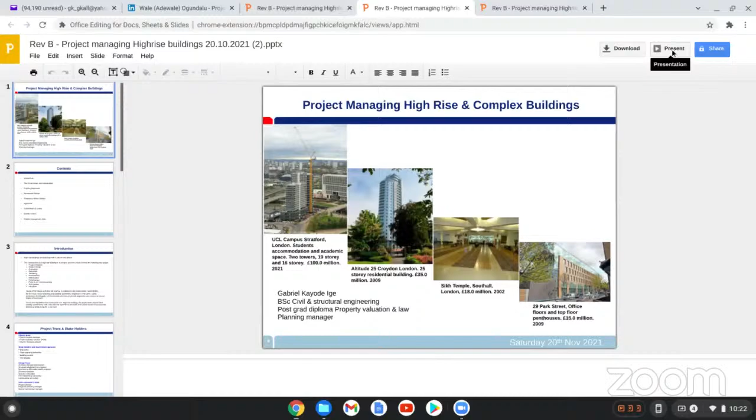Mr. Ige, I believe you're on mute, sir. Yeah, thank you so much, Sean. Can you see my screen? Yes, you can. Thank you all for spending this Saturday morning with us. I'm just trying to get my slide. Am I on slideshow format now, Sean? Hello, Sean, am I on slideshow? Can you see my slide? Hello? Yes, we can, yes we can. Oh, you can see. Sorry, you can't see me, I was giving you thumbs up but you can't see me. Okay, okay, thank you so much.

I'm delighted to be here today to share my experience. Most of my experience has been from the UK, but I've done some short-term consultancy work in Nigeria and interacted with various stakeholders in the construction industry.

This slide is showing a few notable projects I've worked on. The first one on the top left is a job we're currently building, and that photograph is not an artist's impression, it's actually a photograph of the project taken from another project which is 38 stories. This project is the secondary campus for University College London, based at the Stratford Olympic Village. Students accommodation, 524 rooms, 2 towers, one 19-story and another 16-story, sitting above 4 floors of academic space. The value of that is 100 million, and it's due to be completed in May next year, so we're working really hard to get that done.

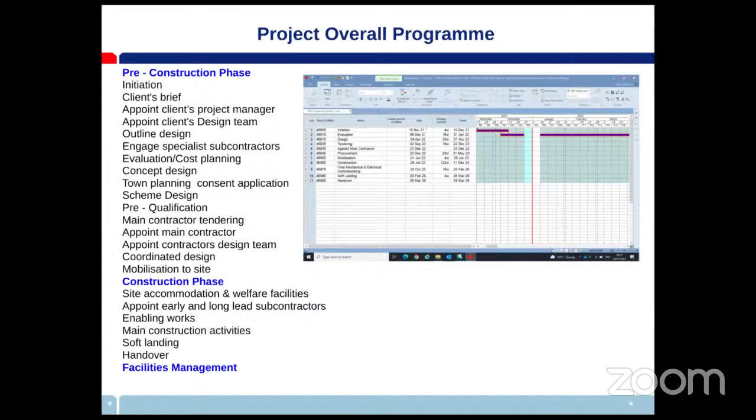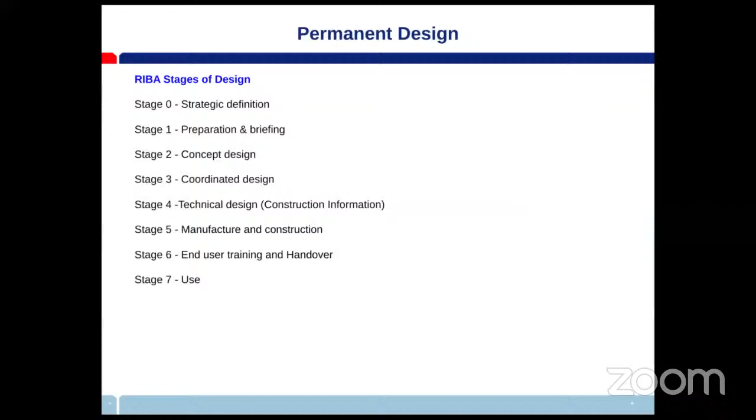Temporary works design: the design solution used to support the permanent work. So while the concrete is still not up to strength, you need to put in some temporary works to support it till the concrete slab and beams gain 28-day strength. Or we use it to support trenches while excavating for drainage, or as the foundation for a tower crane, and also sometimes access scaffold for access. You can also put in some fans to protect people walking below, including the public.

Examples of temporary works are site boundary hoarding, site accommodation, gantry, tower crane foundation, cantilever deck, hoist, mast climbers, and so forth. You can see there are some sketches here, showing on the left where you have a suspended slab as you're going up till the slab gains 28-day strength.

You have to actually put in some props, so you have the falsework right at the top which supports the slab that you're going to cast. Below that, you need to have another 2 levels of props, just to make sure, because the slabs below might not be able to take all that load, as the loads haven't been transferred into the column. So you temporarily support it, and you crush your cubes till the slab above reaches the required strength. Then you can remove some of the props.

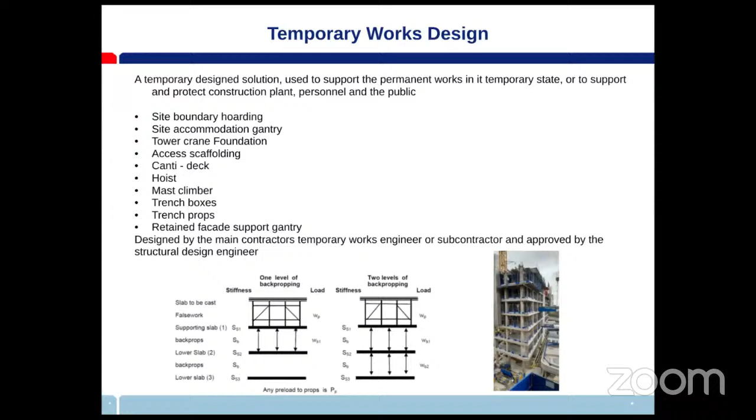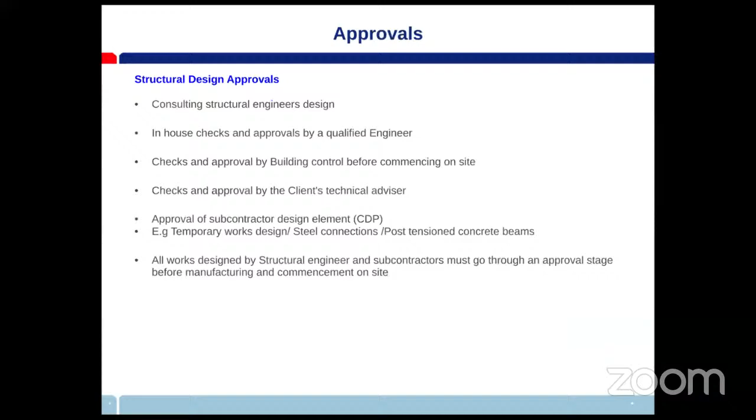Approvals: the consulting engineer does the design, and then another in-house engineer will do an independent check on his design. Then you submit to building control, who does the checks and approves before we start on site. The client's technical advisor would also do his own checks and approve. There are also some subcontractor design elements, like structural steel or cladding, where the subcontractor would develop the design and then submit for approval again to the structural engineer. So at every stage, everything must be checked and approved before you actually go into manufacturing.

CDM regulation - construction design management regulations. It's a law, an act in the UK where everybody has responsibility, every player. The aim of CDM regulations is to improve health and safety in construction work. It's a legal requirement.

The golden rules of CDM: CDM applies to every construction work in the UK, even if it's just 1 hour of work - you must apply CDM. Anyone appointed to work on a construction project must have the skills, knowledge, and experience to carry out their role. Each duty holder has his own duties that he must carry out under CDM.

The role of the principal designer and the principal contractor must be appointed on a project with more than one contractor. There can only be one principal designer, and that principal designer is responsible for the design. The principal contractor is responsible for safety on the construction site.

Projects with more than 500 person days, or 30 working days and more than 20 workers, need to be notified to the Health and Safety Executive.

Pre-construction information must be provided by the client on every project. A construction phase plan must be provided for every project by the principal contractor or sole contractor. The principal designer must create and develop a health and safety plan to hand over on completion of the project.

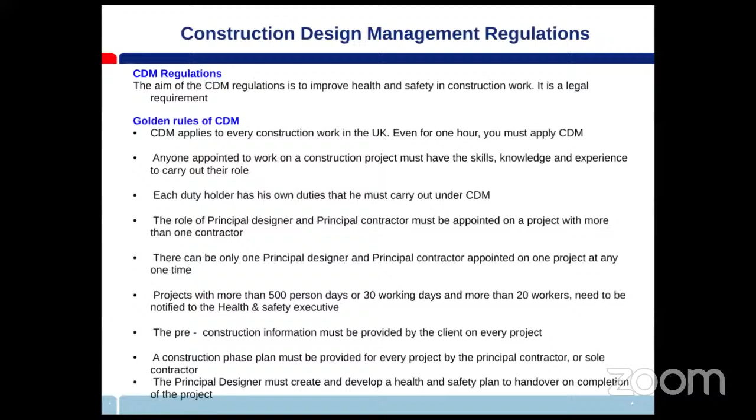There's one bullet point I missed - the client also has responsibilities under CDM. So everybody has responsibilities. Nobody can say, I blame you for that. You have your own responsibility legally.

Quality control. There are some basic but very important quality control procedures. Before you even start constructing, you need to produce what we call inspection and test plans. You produce that by going through the structural engineer's specification and listing out anything that needs to be approved - for example, the pour layout of the plan, where your construction joints are going to be. It'll tell you how many cubes you're supposed to test, the slump, and the layout of your formwork.

It's like a checklist that you give to the engineer, and he can use that for his checks. So basic checks before the concrete is cast: check the formwork, check the false work. False work is what supports the formwork, which is the plywood that contains the concrete. Check the reinforcement, that it's according to the reinforcement drawing. Check cover, that is the gap between the reinforcement and the formwork, so the concrete surrounds it properly and it performs as required. Check for cleanliness - if you have mud in the concrete, it wouldn't perform as it's supposed to.

Once you've done all your checks, the site engineer would sign an inspection sheet showing exactly what checks were done and what remedial works have been done before the concrete goes in. When the concrete arrives, you check the delivery note - we have ready mix concrete in the UK. Make sure it's the right concrete mix, because in some cases the wrong concrete mix has been delivered, and if you don't catch it in time, then you're looking for trouble.

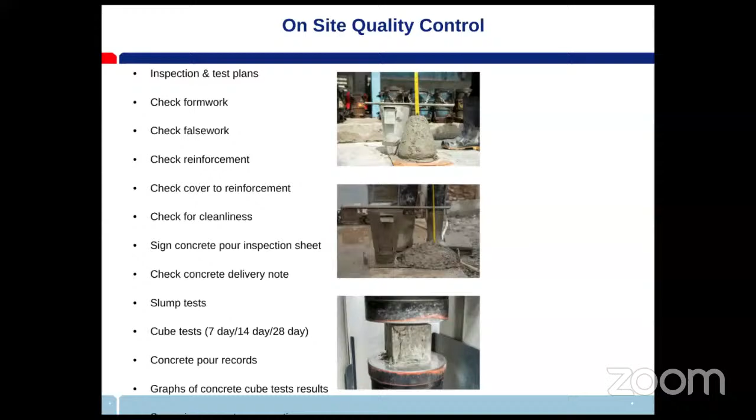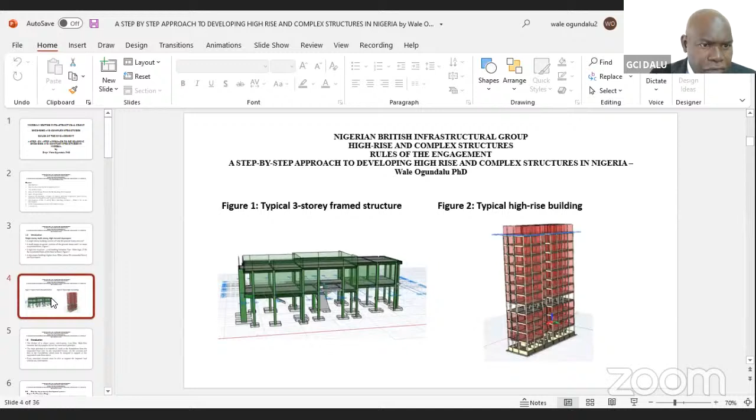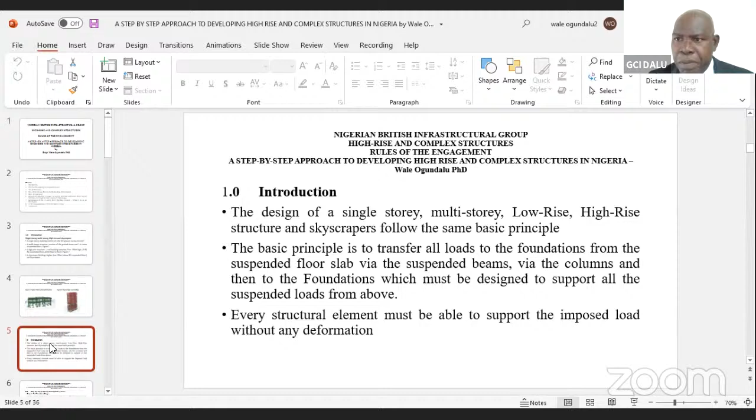I was on slide 5, and slide 5 has to do with the introduction. I was mentioning that the design of a single-story building, a multi-story building, and a high-rise or skyscraper follows the same principle, and that is to transfer the load from the superstructure to the foundation. All vertical loads and horizontal loads in the structure are transferred to the foundation, and the foundation is to be built without any unnecessary stress.

There are 7 basic steps to the property development process. Step one is the pre-purchase stage, whereby you go ahead and source for funds, source for the land, and decide on what to do. The second step is the contract negotiation. You negotiate for the price of the land and you buy it, or you might decide you want to take it on a lease and the terms of the lease.

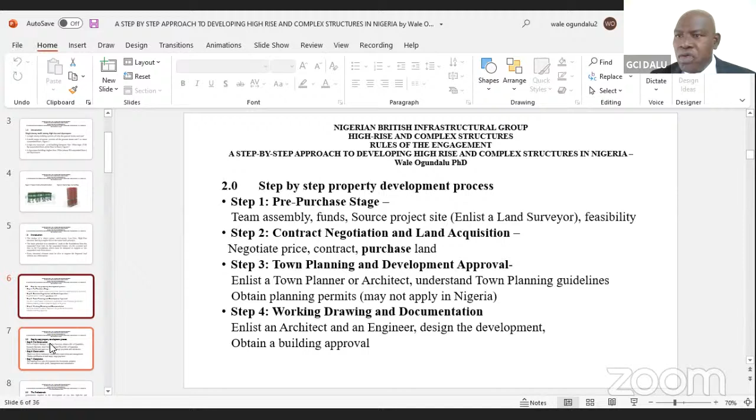Then 3 is the town planning and development approval process. Usually in the UK, you might have to go to the council, first of all, to obtain approval for the proposed development before you go and do the drawings and all those things. Here in Nigeria, it may not be necessary. So the next thing is you do your working drawings, and after you do your working drawings, which is step 4, you go and submit them for approval.

And then step 5 is the pre-construction, in which case you negotiate with the builders, you select a contractor, and then you hand over the site to him in step 6 for the construction. You hand over the site to the contractor, and he does all his work under supervision. And when he completes his work, step 7 is the completion. He hands over the keys to you. And then you decide whether you want to sell or lease the building, whether you want to make quick money, or you want to make

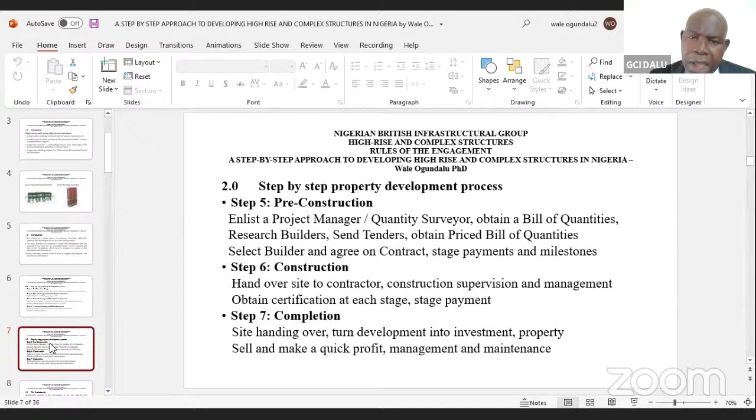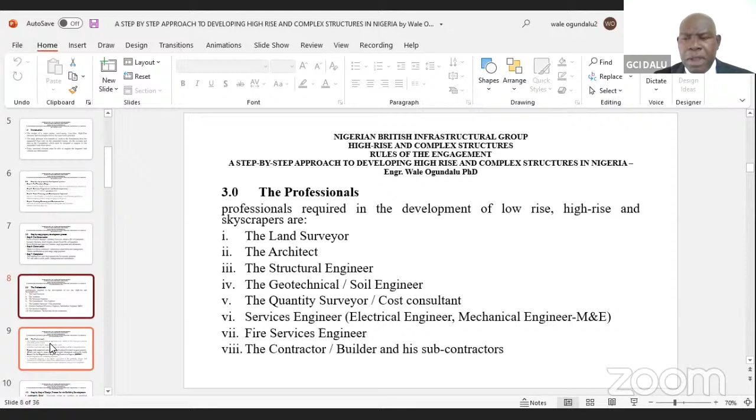longer time. The professionals involved in the design of a high-rise structure are the same you will need when you want to design a bungalow. This includes the land surveyor, the architect, the structural engineer, the geotechnical engineer, the quantity surveyor, the service engineers, and then the contractor. We encourage people to engage only competent and capable registered professionals on your project. And the client has the right to view your qualifications to confirm that you are not a quack.

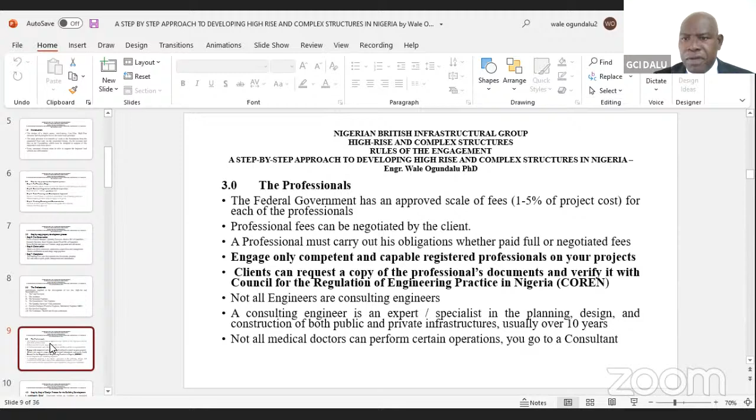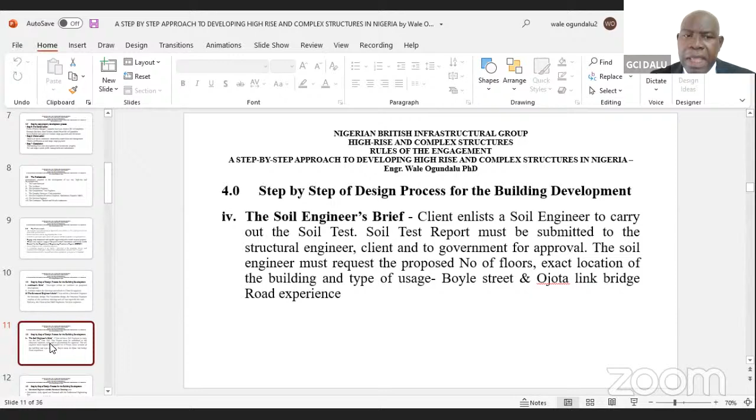In order to complete his job, the structural engineer needs the soil test report. You must do a soil test report for every site you are building on. Under every building, you must do a soil test. Then the geotechnical engineer writes the report and sends it to you. As an engineer, you are interested in the soil profile under the building and the allowable bearing capacity of the soil. After the structural engineer completes his job, he gives the drawings to the client.

The client also enlists services engineers, M&E, and the rest, and all of them do their calculations and drawings and hand them over to the client. The client then enlists a quantity surveyor who does the bill of quantities, and then they can invite bids. The bid can be open or closed. Open, you advertise to the general public and they submit. Closed, you select some contractors and they make their bids. Then you select the best 3 and invite them for further negotiations. After that, once everything is done, they move to site and start the work.

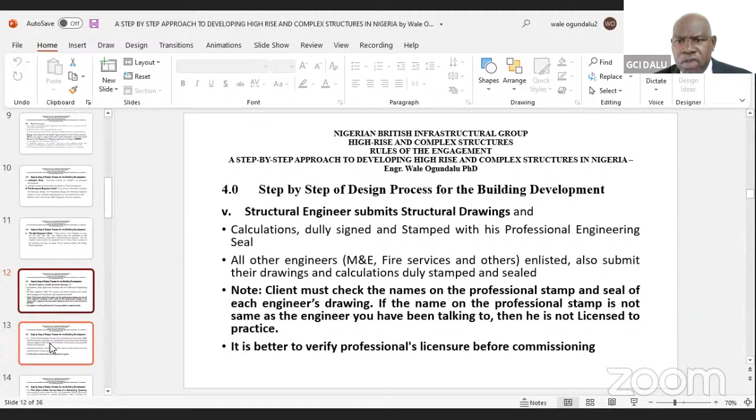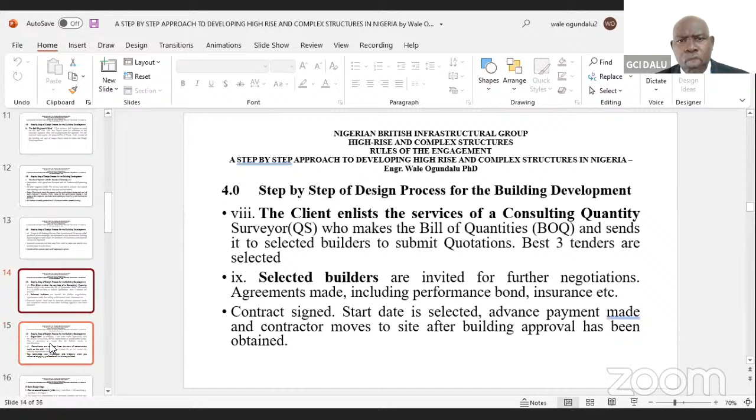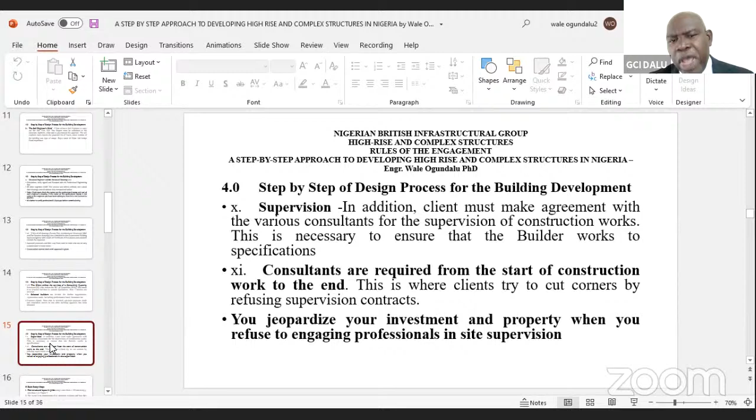It is best to verify professionals and make sure that you also have an agreement for resident supervision. Construction cannot start until approval is given. Select your builders. Then consultants are required from the start of the construction to the end of the construction work. You jeopardize your investment and property when you refuse to engage professionals in site supervision.

Basic design steps. For the structural engineer, the first thing is to do your structural layout. That is the general arrangement of the floor plan. You arrange the slab to be supported on the beams. You arrange the beams to be supported on the columns. And the columns, you try as much as possible for them to be vertical and to transmit the load directly from the upper floors to the foundation. When your columns are not straight, you have more headaches.

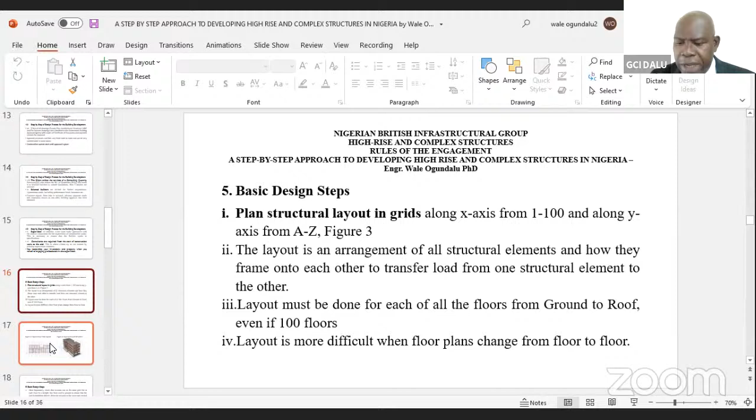This is a basic typical floor plan, and you can see a typical frame structure. You can see the columns, they are straight and they go down. Most of the time when you are doing your design, you start from the roof and then you go down. I, as a person, make sure that I arrange my frames in grids, and I can identify each column from the grids. I can call them column B12. That is the column on grid line B, and on the other side on 12.

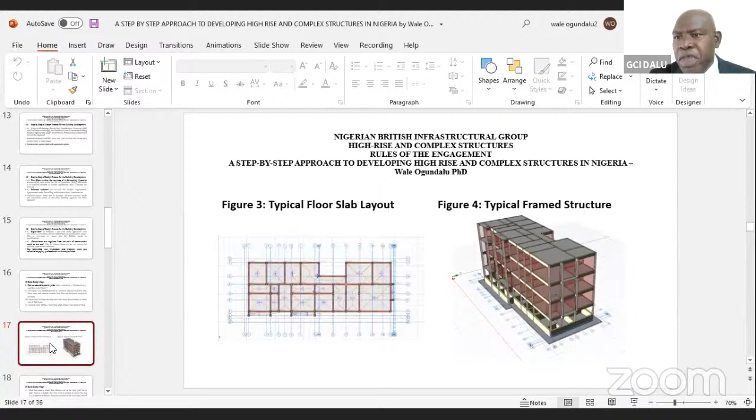Basic design steps: like I said, you do your design calculations and everything from slab onto beam onto column, floor by floor. For high-rise buildings, you need to check the stability of the structure under wind load. You need to obtain the wind load and distribute it onto the wind-resisting elements. Usually, we use shear walls. But if you don't want to use shear walls, you can use a column and frame structure.

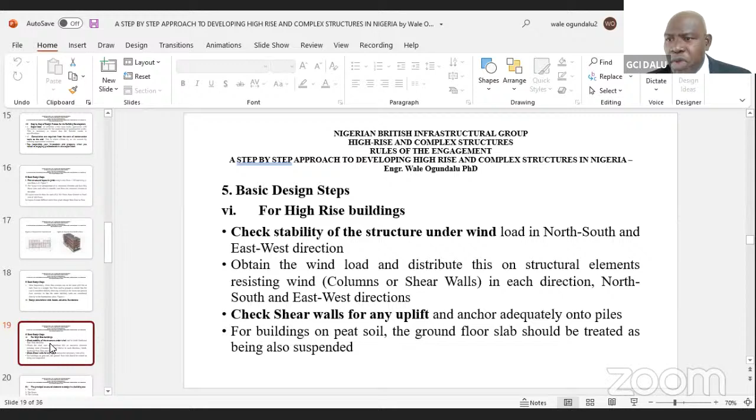Then you also check that for the shear walls there is no uplift. And if there is uplift, then you find a way to anchor it onto the supporting pile foundation. So these are the principal structural elements that you design.

And then basic signs of distress in a building: you have cracks, horizontal or vertical. When you have vertical, it's a sign of a foundation problem. Then you can also have settlement, and you can also have tilting. Tilting is a form of settlement, but differential settlement. And you can have settlement where everything settles down along the same direction. But once you have a settlement of more than 25 mm, then you may be having a foundation problem.

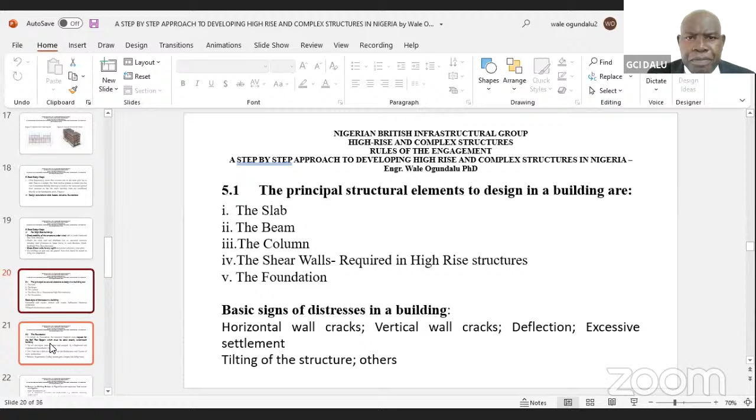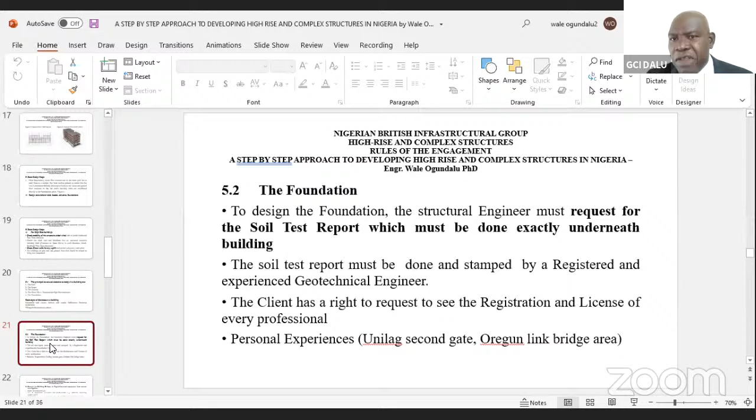Foundation. For every foundation, like I said, you need a soil test report, and the soil test report must be done by a registered professional. There are many quacks in the system, and this is why I'm mentioning all this. When the time comes to share some experiences, we can talk further on that.

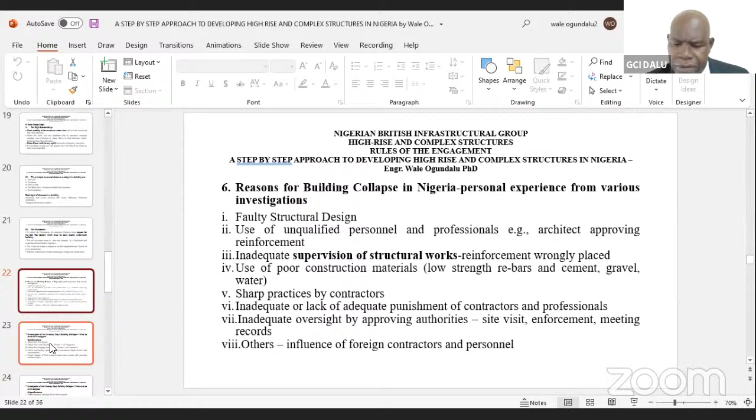Reasons for building collapses in Nigeria. The first one I would say is faulty structural designs. Use of unqualified personnel, inadequate supervision, sharp practices, and then I will also say influence of foreign professionals. When we need to expand on that, I will do that.

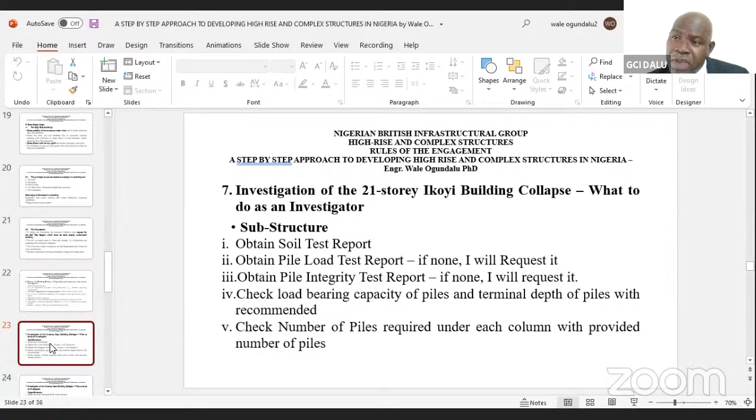These are areas where you have sharp practices. You tell somebody to do piling to 30 meters, and he stops the piling at 12 meters. One, you have reduced the pile capacity. Two, if you are unlucky and you have a deep depth of peat, then you will be putting your building on inadequate soil.

For the superstructure, I will check the columns. I will obtain the structural drawings, I will obtain the structural calculations, and I will check every structural element, especially the columns. The collapse is a total collapse. It is not partial, and that is what makes it more serious, with a very serious impact.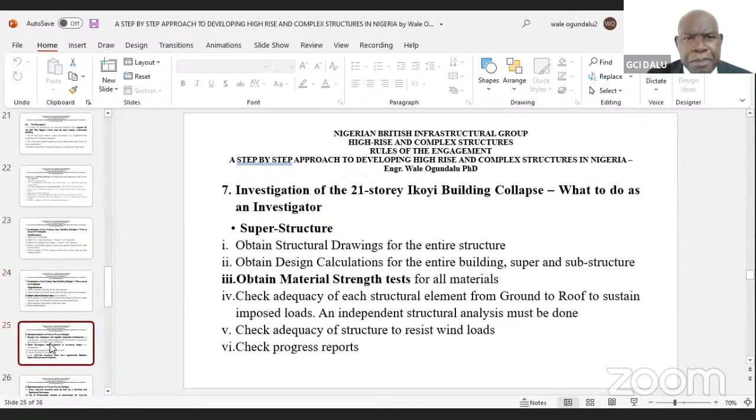Recommendations: engage only competent and capable registered professionals. Teach developers basic elements of structural design. Every high-rise structure must have an experienced resident supervising structural engineer. Every high-rise structure must be built by a certified registered contractor. Use of the direct labor method of construction for high-rise buildings must be banned.

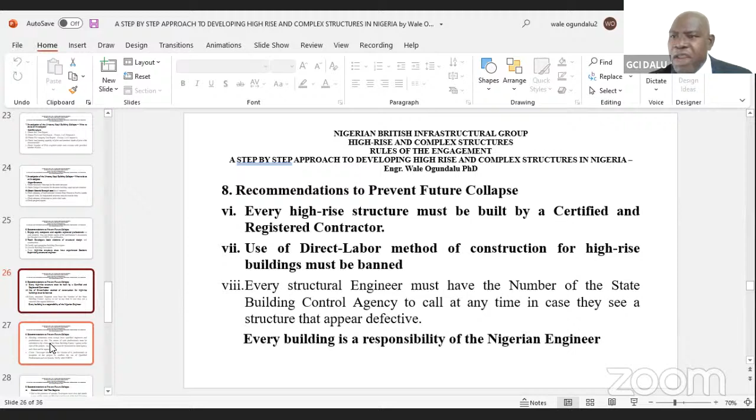Every building is a responsibility of the Nigerian engineer, because when a building collapses, it is a reflection of the Nigerian engineer. So as we go along in our daily path, look at structures. And if you see any that may have a problem, call the government agency. So the building contractor must always have qualified engineers on site.

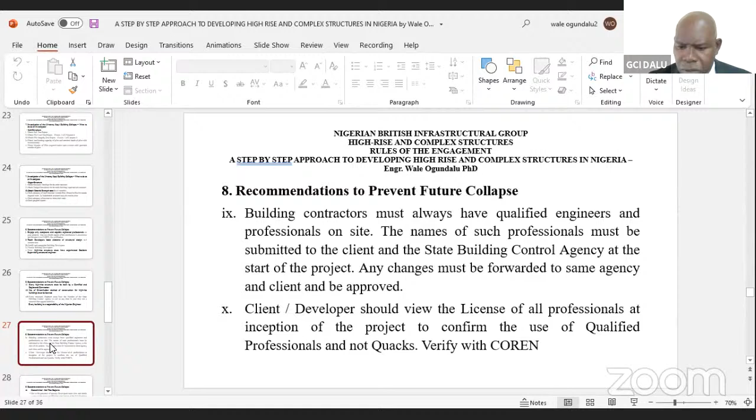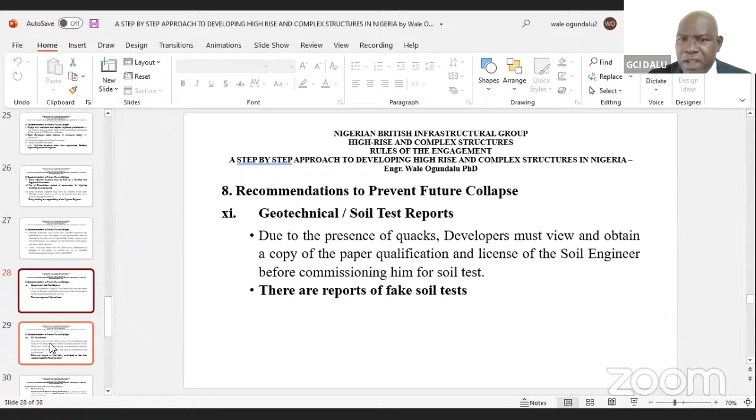For the geotechnical soil test report, like I said, because everything you are building depends on the ability of the soil to sustain those imposed loads, the soil test report must be done by a registered professional. And you must check that you are not using a quack. On the pile foundations, the same thing.

We have piling contractors now who are not really engineers. Some may have worked under some engineers before, and then all they do is get money, buy a rig, and then they say they are piling contractors, and they go ahead and start piling. Meanwhile, they are not adequately equipped, either in terms of academics or knowledge.

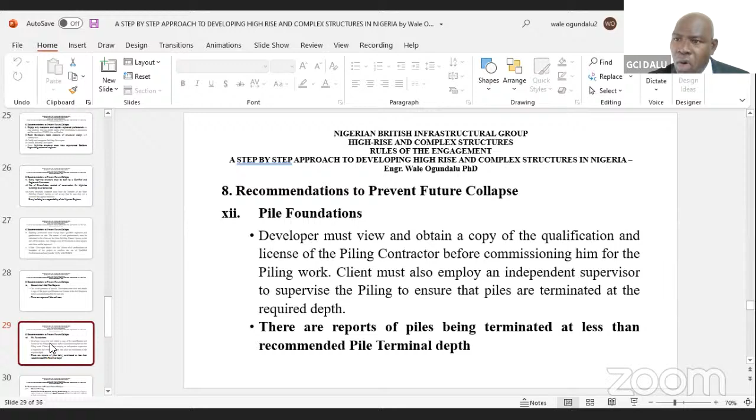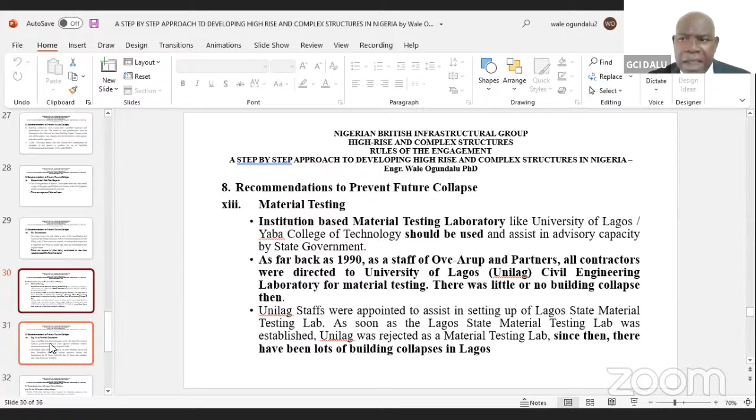Material testing. Institution-based material testing laboratories like University of Lagos and Yaba College of Technology should be used in an advisory capacity and to assist in material testing. As far back as 1990, as staff of Ove-Arup and Partners, all our contractors were referred to University of Lagos for material testing. And I can say there were little or no building collapses then.

Say no to vertical extension. Once a foundation has been built and you now go and raise the structure, you are adding load which has not been accounted for in the foundation design.

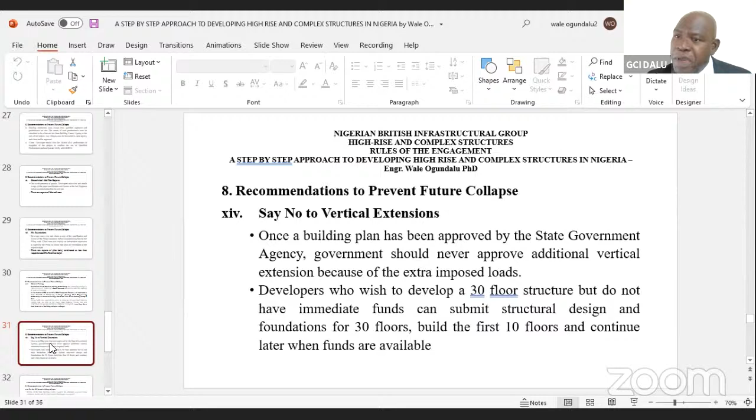I can share one or two experiences later, but if you know you want to go for 20 floors, you can design your structure for 20 floors and the foundation for 20 floors, and then build it to 10 floors if you don't have money. And then you continue later when you have money. So right from the beginning, design your building and the foundation to carry the number of floors you want.

For the 21-story building, there are some other recommendations that you need to do. But because of time, let me just run to my conclusions. Engage only competent and capable registered professionals on your project. Clients can request a copy of the professional's documents. And if the name on that document is not the person you have been talking to, just know straight that it is a quack.

Consultants are required from the start of a project to the end of the project. You jeopardize your investment and property when you refuse to engage professionals in supervision. Every building is a responsibility of the Nigerian engineer. Institutional-based material testing laboratories are highly recommended. Say no to vertical extension.

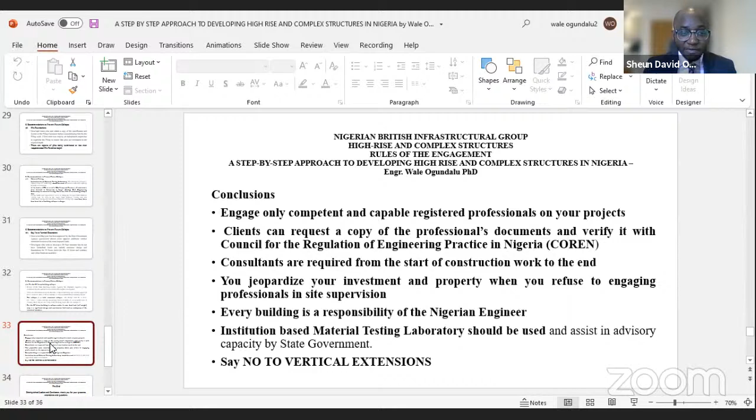Mrs. Udo Okonjo is an international lawyer and astute real estate entrepreneur who is currently the Chief Executive Officer and Vice Chairman of Fine and Country West Africa. She also serves as an independent director and chair of the Governance and Remuneration Committee on the board of CAP PLC, a subsidiary of UACN PLC, one of Nigeria's oldest and largest publicly listed conglomerates. Mrs. Okonjo is a seasoned legal practitioner who was admitted to the Nigerian Bar Association and New York Bar in 1991 and 1994, respectively. She has had a successful legal and entrepreneurial career for more than 3 decades.

Udo acted as the senior special advisor on legal and constitutional matters to the Senate President of the Federal Republic of Nigeria and was a partner at a leading commercial law firm, Templars Barristers and Solicitors. As the best graduating female student at the Nigerian Law School in 1991, Mrs. Udo Okonjo was awarded the prestigious British Chevening Scholarship to study at the University of London, King's College School of Law, where she graduated with a master's degree in law, specializing in corporate and commercial law.

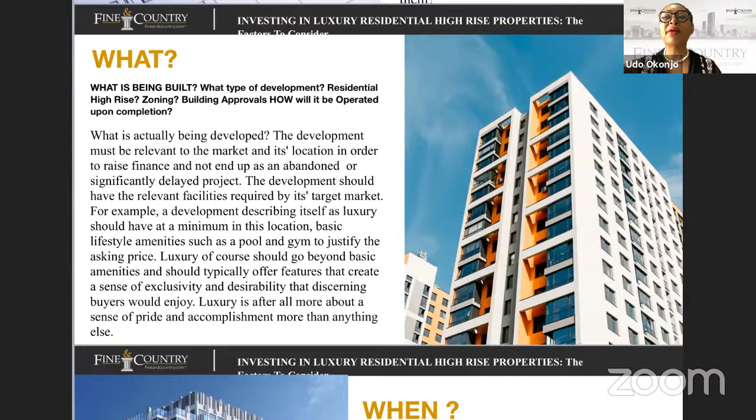So as far as the what, you want to know what sort of zoning applies. I believe it's important for investors to ask themselves if they are building, if they are rising high with the right foundation. Because if the foundation is wrong, and by foundation here I'm referring to the legal foundation, the statutory and regulatory foundation, this could even affect the quality of your title in the future. If someone was meant to build only 40 apartments, or 20, and they ended up with 60, one wonders what will happen in 10 years when the Pharaoh that did not know you at the time comes into place.

The third question is the when. Completion risk is critical for investors. If you're buying into a development as a buyer, as an investor, even as a funder or financier, when will the development be completed? Is the time frame realistic? I can't tell you that we have met any developer that has presented their project within a realistic time frame. So with experience now, anyone who gives us a time frame, we tend to, from a marketing point of view, encourage them to expand it.

This is an important question because it has very important implications. High-rise buildings cost a lot of money, and the cost of delays are very significant. This is what tends to lead to compromise along the way. Some people compromise in terms of finishing, in terms of quality. Hopefully they don't compromise at the early stages in terms of the structures, the foundation, and all the other critical elements. But from our point of view, as a marketing firm and as advisors, we tend to view the full 360-degree aspect of the project from beginning to end.

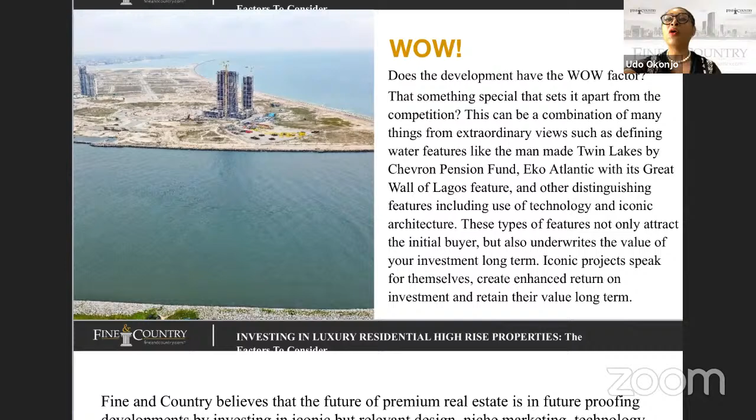When we look at Dubai, Singapore, and all of those locations in creating the wow factor, they definitely were using the top professionals, the minds, and the specialists, and all of that. So the wow factor is always important when you talk about high-rise residential, but we should not compromise the wow factor, or because we want to get the wow factor, forget to actually do the work that it takes.

I'm just going to wrap up in the next minute or two with our key recommendations. Regulation, we can't speak enough about it. It's not enough to have recommendations. It's important that we actually have regulations that are not just there, but actually enforced.

It's important, as we learn from the UK and other locations. Luckily this forum is doing that, because we're exchanging knowledge, that we begin as stakeholders to go for more stringent requirements in the sector, because what affects one affects the others.

We believe that regulators need to be more diligent. From our point of view, there's no way that the regulators can be absolved of responsibility and potentially liability in what has happened, but that's not our call to make. It will really come back to those who've invested and all the other stakeholders.

Due diligence cannot be overemphasized. It's absolutely critical. The who, the what, the where, understanding in particular who is building, and across the whole chain, the consultants and all of that. I dare say that when you're talking about high-rise buildings, you want to literally certify contractors and consultants who have specialization in these types of things.

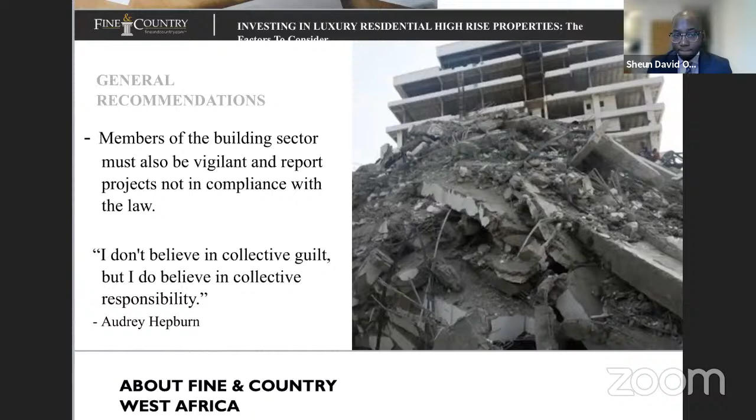On that note, I would like to say thank you very much to the organizers once again for this opportunity to share our perspective, and hopefully I can contribute further in the Q&A session.

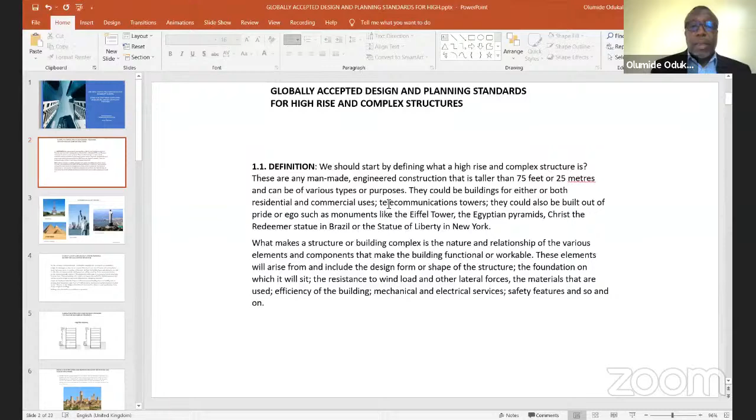What makes a structure or building complex is the nature and relationship of the various elements and components that make it functional or workable. These elements arise from and include the design form or shape of the structure, the foundation it will sit on—which is a challenge we've seen today, especially in Lagos where we have a lot of loose soil—the resistance to wind load and other lateral forces, the materials used, the efficiency of the building's mechanical and electrical services, and several other factors.

For the purposes of this presentation, I'll be discussing high-rise structures used as buildings. As we have said, a high-rise building is one that is of a certain height. A high-rise building has become more usable and popular because of elevators and the advancement of technology.

The discovery of the elevator made it possible for people to move between various floors, to move goods and people between floors. These are buildings with heights, and we also have to look at it from a fire and safety point of view. There are buildings whose heights are beyond the reach of firefighting equipment, which can have serious impact on evacuation of occupants in emergency situations.

A high-rise building is defined as a building with an occupied floor located more than 75 feet above the lowest level of fire department vehicle access. We can also talk about what sort of fire equipment we have in Nigeria. Because of the heights and numbers of occupants, fire safety is a major consideration in the design of high-rise buildings.

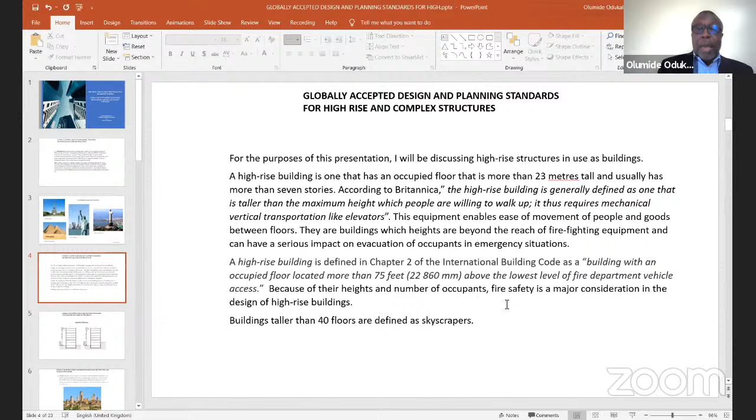Now I want to go back and look at the history of high-rise buildings. How did they come about? Where did they start from? They date back as far as ancient Rome and the Roman Empire, where some high-rise buildings and towers were erected to defend cities. A few examples are in Egypt and in San Gimignano in Italy.

Some of these buildings at that time were made of wood and brick, so it was not uncommon to have failures in those structures. But the discovery of the elevator and steel during the Industrial Revolution removed height limitations for buildings. It was not possible to go much higher before because we could not frame the building with steel, which was a new material not available for a long time.

Several other socioeconomic factors have contributed to the increase in development of high-rise buildings: the increase in population density and the need to provide housing for that growing population. Especially after World War II, we've seen a global population explosion, especially in Lagos now, where we've seen what's happening with population increases.

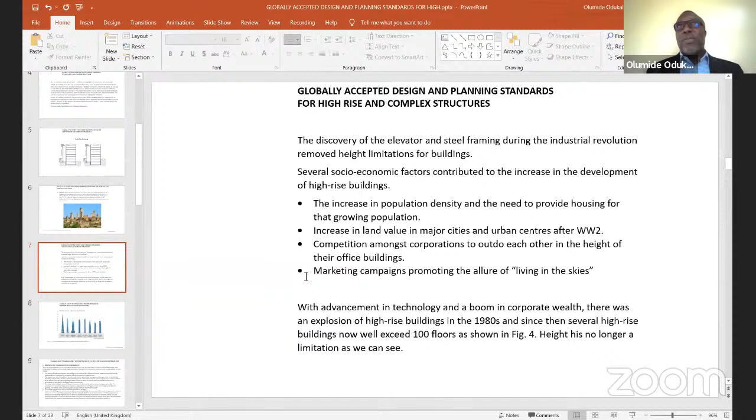Now, several high-rise buildings exceed 100 floors—that's not even uncommon anymore. Height is no longer a limitation. As we have seen if you travel to various places, the tallest building now is the Burj Khalifa in Dubai, which many people did not even think could be built. It is about 828 meters. This sort of building is now quite common to see.

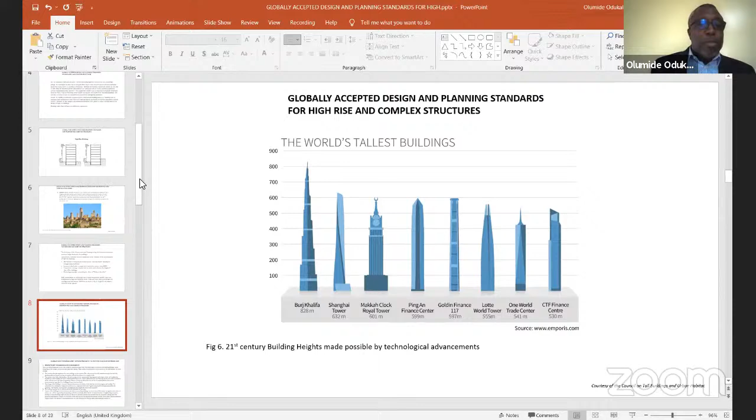What is the design process for this kind of building? There are several factors that should be considered by architects and building designers when embarking on the design and planning of high-rise buildings, which would be consequential to the success of the final product. These would include, as mentioned by the previous speaker, Mrs. Okonjo, the permitted height regulations for such buildings in that location.

What is the zoning for that location? This information is usually available through the local city planning office or gazette, and any restrictions defined therein must be complied with. Also, the nature of the soil in that location.

This will usually require a geotechnical investigation and analysis of the soil in which the foundation of the building will sit by a geotechnical engineer in order to determine the load-bearing capacity and other conditions of the soil, and therefore the foundation type to be used.

Now, this is very important in a city where there's a lot of made-up ground. We hear this expression, oh, sandfill. So a lot of reclamation has been done. For instance, Parkview Ikoyi used to be a park, and it was quite swampy. That has been filled up. Even Banana Island was water, and it has been filled up.

So it is very important in a city like Lagos that the nature of the soil is ascertained, and thereby the foundation type to be used is properly looked at. What is commonly referred to as a soil test is conducted, and it has now become a requirement by Lagos State for buildings of more than 2 floors.

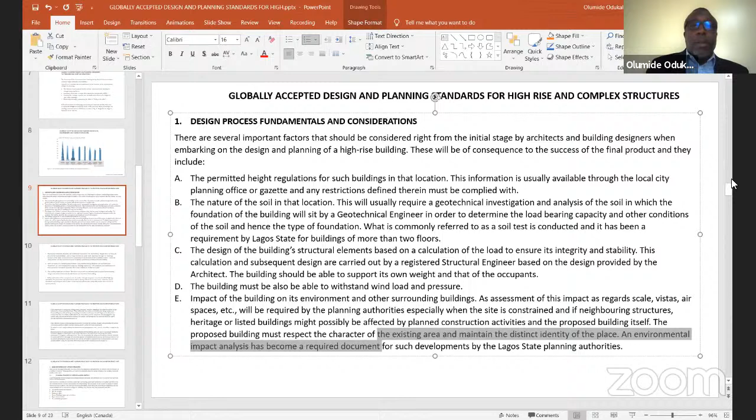Then mechanical, plumbing, and ventilation requirements for the building. Now, these are usually done for most buildings, small and large, but they are particularly important for high-rise buildings because of the large occupancy and the complexity of the network of these building services. Several of these services are also designed to achieve good efficiency for the building.

Recently, in the last decade, people have been talking about global climate change; sustainability, energy efficiency, and environmental friendliness are now designed into many buildings. LEED standards and certification are now commonly desired and are achieved. This is now also catching on in Nigeria. There's a demand for this sort of buildings now. People want to save energy. People want to protect the planet. And why should my building use so much energy?

Then also the building brand and the aesthetics. Every building of that nature has a client. The client's vision must be enhanced and projected by the building's design and choice of material for the interior and exterior of the building.

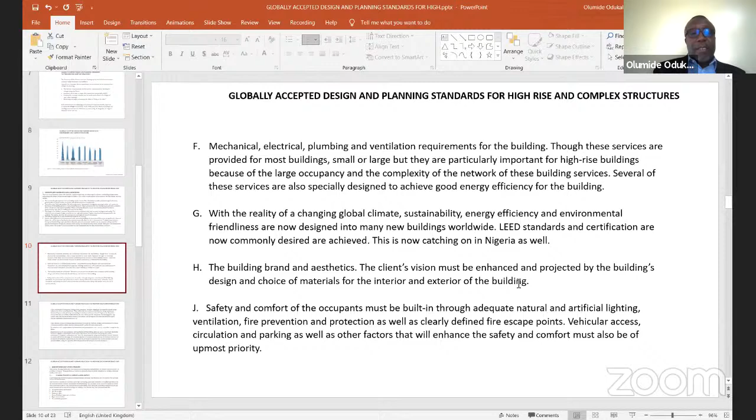And safety and comfort of the occupants must be built in through adequate natural and artificial lighting, ventilation, fire prevention and protection, as well as clearly defined fire escape points. Vehicular access, circulation, parking, as well as other factors that will enhance the safety and comfort must also be of utmost priority.

A full complement of experienced building design consultants must be engaged on the project. A few of the previous speakers have spoken on this, to provide design solutions for all the factors listed above. This would include the architects who initiate the design concept, the structural engineers who design the building's foundation and frames, the MEP engineers for the various services that make the building comfortable.

Then oftentimes there are specialist consultants who handle several other aspects, like the soil engineer we have spoken of, fire safety and detection, egress, that is how to get out of the building, security, information and communications, etc. Large volumes of construction drawings and documents running into hundreds of pages are produced by the various consultants in order to obtain necessary planning permits and for the construction work.

To embark on such a project without the involvement and participation of such a team is most often a recipe for failure. Now, it is not uncommon in this country for people not to even consult, not to engage consultants. Oftentimes, consultants are even seen as an additional cost to the project. So a lot of clients try to do without them. Oh, I don't need that extra cost.

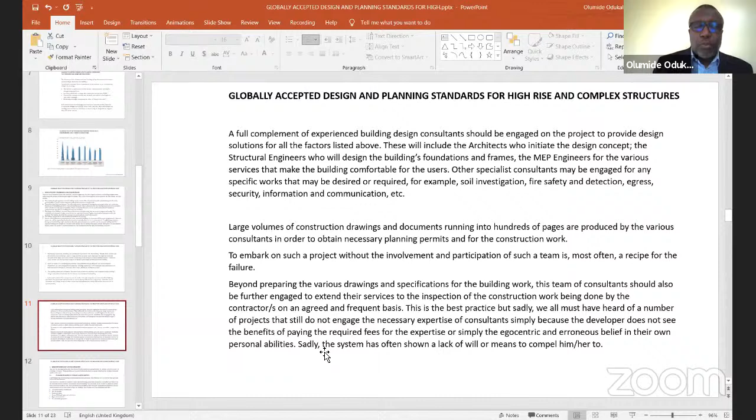Now, what are design and planning standards? What are the standards that we're talking about? These are sets of guidelines that have been defined by regulations over time, and they must be adhered to in the construction of the building. These guidelines are in place to ultimately allow for the optimal integrity of the building, safety and comfort of the user.

Now, what happens in other parts of the world? What is globally accepted? I'm going to focus on North America, which is where high-rise buildings became very popular before Asia took over, and they seem to have a lot more of those buildings. Now, in defining globally accepted design and planning standards, we cannot but ultimately do it in a manner that we relate them to our local situation. So when we look at what happens in North America, we also have to compare it to what obtains in Nigeria. What is different? What are we doing differently? Why are we having all these issues, all these building collapses?

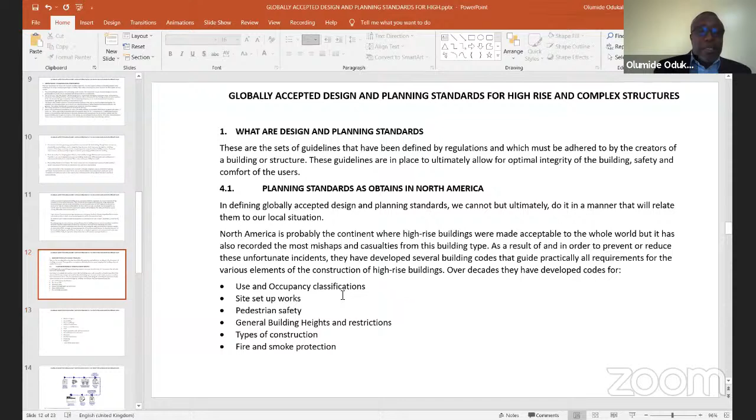North America is probably the continent where high-rise buildings were made acceptable to the whole world, but it has also recorded the most mishaps and casualties from this building type. They've had fires, they've had collapses, they've had terrorism, they've had loss of life. In order to prevent or reduce these unfortunate incidents, they have developed several building codes that guide practically all requirements for the various elements of the construction of high-rise buildings. So there are codes for almost everything: the use and occupancy, the site setup, pedestrian safety, building height, fire, smoke, type of construction, and many more. Plumbing, elevators, the steel, the materials, the roof structure. Everything has a code that must be met.

And the process for approval is pretty straightforward as well. So you have all these codes that you must adhere to. There's a document that tells you what is required. This document is very familiar. A lot of the consultants who are involved are very familiar with this document. They are conversant with what needs to be done.

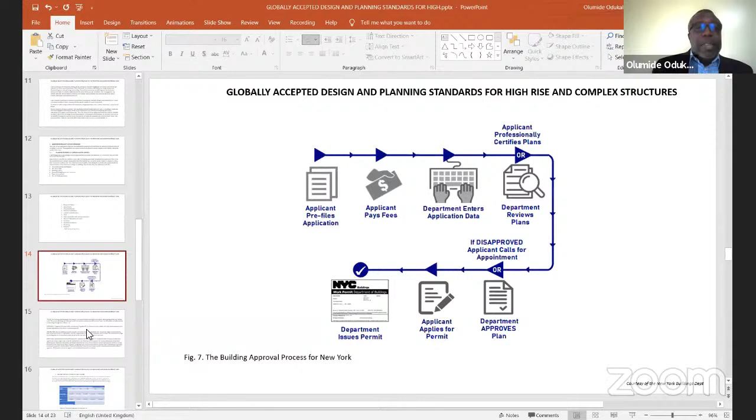Now, what is the process abroad? The drawings and documents are prepared and certified by consultants. The process of design and planning is made less cumbersome because there's information to be obtained. If you want a code, you can Google it, you can make a call, it's online, you can get it. And then the advancement of technology through new software makes the design of high-rise buildings fairly easy. A lot of things have become standardized. For approvals, a registered architect or professional engineer, as the case may be, submits the plans and documents to the relevant department of the city for necessary approval.

Now, this third aspect is very important. The contractor. Once the building approval is issued, that is an approval that you can actually build the structure, a licensed contractor is appointed.

It is that licensed contractor who applies for a permit to build. So he will obtain a work permit to start construction work. Without that license, even when you have approval, a contractor cannot start work. It is important to know the requirements and role of the contractor in this context. The contractor for a high-rise building must be licensed by the state and will be the one who is issued a permit to construct. And inspection.

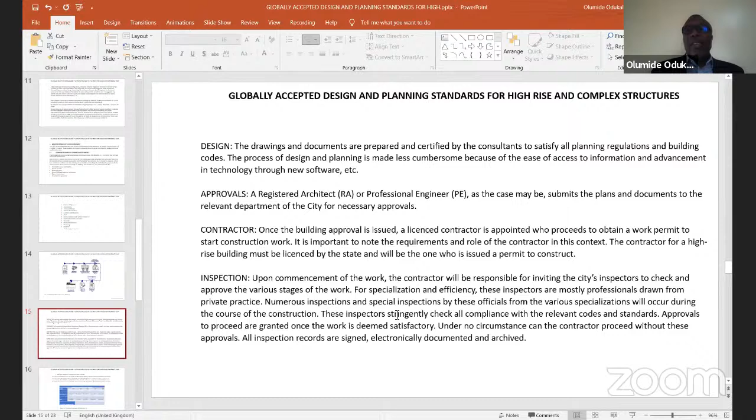These are specializations that cannot all be under the city because they can't have people who have that much knowledge about all these aspects. These inspectors stringently check all compliance with the relevant codes and standards. Approvals to proceed are granted once the work is deemed satisfactory. Under no circumstance can the contractor proceed without this approval. All inspection records are signed, electronically documented, and archived.

Now, what obtains in Nigeria on a normal basis? We're talking about land use and demand on land. As mentioned earlier, increasing land values in cities and population growth have led to an increase in demand. Lagos, Nigeria is not any different. It's where high-brow neighborhoods have witnessed an increase in population and a significant rise in the rental value and cost of land. Somebody was telling me some days ago that Banana Island, for instance, was 10 million two decades ago. Now, they're probably talking about 600, 800 million per plot. You can then look at what that means.

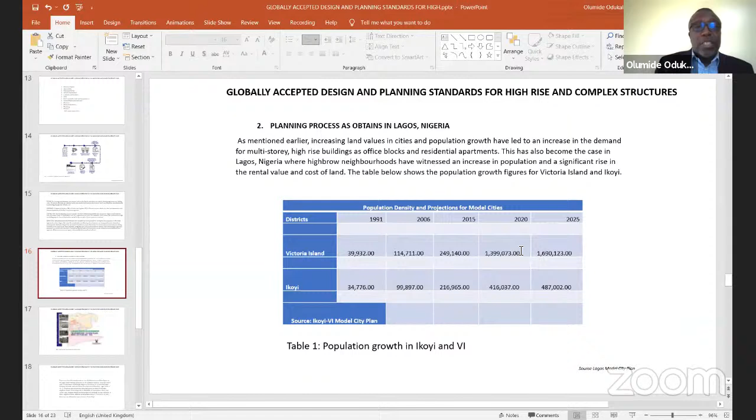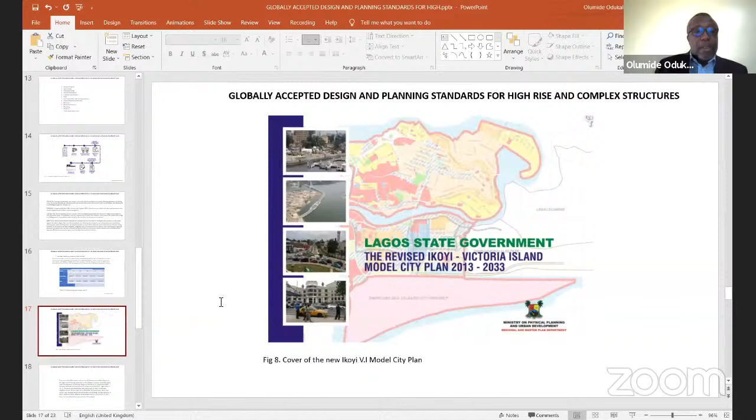So the table below shows population growth of VI and Ikoyi. This is from the Lagos Model City Plan. In 1991, Victoria Island had 40,000 people. The projection for 2025 is about 1.7 million people. Ikoyi seems to follow the same kind of trend. Ikoyi used to be a low density, quiet neighborhood, but that seems to be changing. There's a new Lagos Model City Plan. There's one for Ikoyi and Victoria Island. There's also one for Ikeja. Those are considered urban centers in Lagos.

There was a lot of frustration and pressure by landowners and developers on the state planning authorities to lift existing restrictions on height, which many developments had already begun to contravene. In a place like Ikoyi, there were people who felt, if I paid so much for this land, why should I just put 1 unit on it when I can put 6 units? So flats were starting to be built on a single family plot of land. In response to these changing demands and other future development objectives, Lagos State introduced a model city plan document for Ikoyi and Victoria Island in 2013.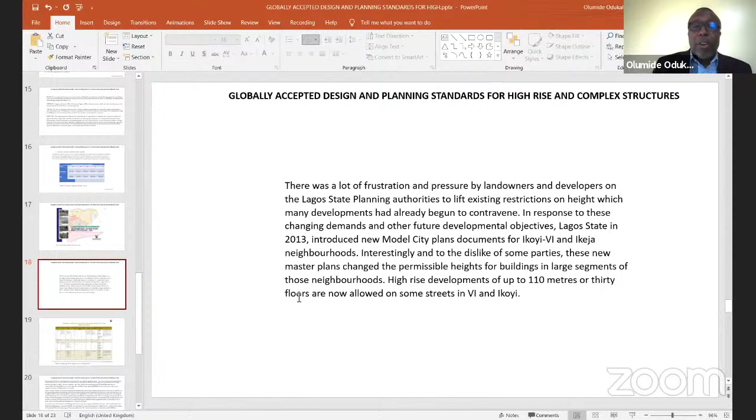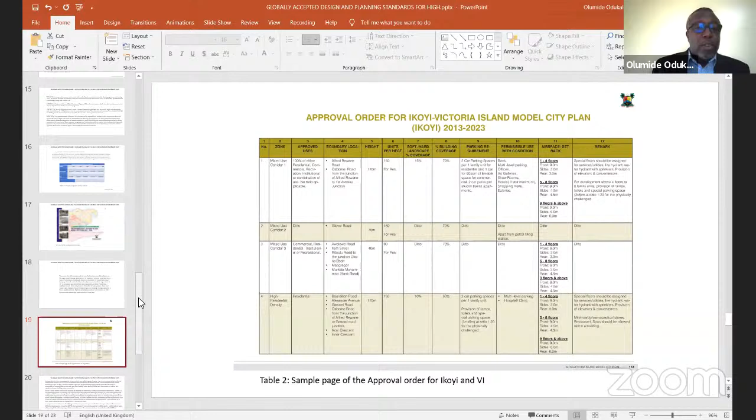And interestingly, and to the dislike of some parties, this new master plan changed the permissible heights for buildings in large segments of this neighborhood. High-rise developments of up to 110 meters or 30 floors are now allowed on some streets in Ikoyi and VI. This is a page from the new approval order from the Model City Plan. The recent unfortunate incident occurred on Gerard Road. If you look at row 4, Gerard Road is now 110 meters permissible. Units per hectare is now 150 units per hectare. So that tells you what the future holds in terms of building heights in Nigeria.

So in preparation for this master plan, Lagos State had a review. The Lagos State Assembly enacted a law in 2010 for the administration or regulation of physical planning. So they created new departments within the Ministry of Physical Planning. So they have the Lagos State Physical Planning Permit Authority. They are actually the ones that issue building permits to intending developers. Then the Lagos State Building Control Agency. Anybody who is in the building industry would have heard of LASBCA. They have the authority to enforce, regulate, and inspect buildings under construction.

Now, the process is not different from North America. Drawings are prepared by registered building professionals for submission to LASPPPA. All required documents are submitted and an assessment fee is calculated. The necessary payments are made.

The town planning officer visits the site to confirm that the site is actually free and ready for construction, and it is what is shown on the survey. Now, once the drawings and inspections are agreed, an approval for a building permit is issued. In all this, there's no demand for the involvement of a licensed contractor.

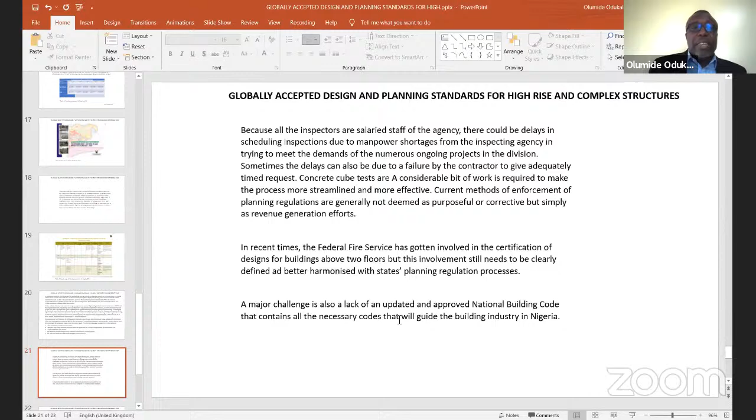Now, in conclusion, the question I will ask is, what can we do better? Some of the differences in the standards adopted have been mentioned earlier, but there are things that we need to improve upon, and this needs to be done urgently. There's a lack of knowledge by the general public of what is required.

Continually educating the public of what is expected and the possible consequences of not engaging qualified professionals for projects. Regular town hall sessions are a very impactful means of achieving this. Providing ease of access to all necessary planning guidelines for the process of obtaining building development permits. Electronic means of sharing information and data will make the world of difference.

A few years ago, Lagos State created an electronic application portal for online approval applications. But oftentimes, there are technical glitches, so people now end up taking their manual applications for submission. When the rules are clearly defined, they will become easier to adhere to. Making the process more streamlined, where documentation is better shared between oversight agencies.

Developments that are compliant are sometimes marked for contravention because the approved documents were not passed or shared to the enforcing unit. So I've seen situations where one agency is not even aware that you're on site, or they're not even aware that this building has gotten planning approval.

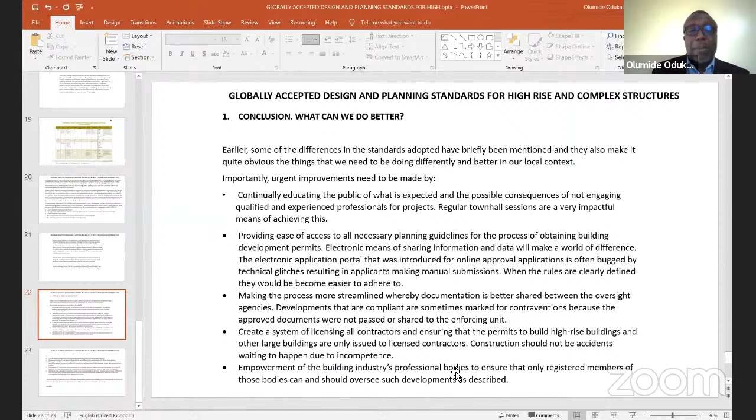We must also create a system of licensing all contractors and ensuring that permits to build high-rise buildings and other large buildings are only issued to licensed contractors. Construction should not be an accident waiting to happen due to incompetence. Empowerment of building industry professional bodies to ensure that only registered members of these bodies can and should oversee such developments as described.

There should be periodic interface between the building industry professional body and the regulatory agency. Several proposals have been put forward, and approval measures were introduced but not followed. Things are still done as before, and there's a slight disconnect between the professional industry and the agency.

The urgent approval of a new national building code that will become a guidebook for all building development is needed, along with enlarging the building construction regulatory and inspection agencies by engaging experienced private sector professionals as part of the mandatory inspection process. This should make the process more robust and build more effectiveness into it.

Ensuring that all stages of construction work for all buildings, especially high-rise and tall buildings, are assiduously inspected from start to completion—from the pile foundations to the roof elements. It's not just walking into the site and signing a paper; everything should be checked.

What is the concrete mix? What was your pile load test result? Did somebody witness the pile load test? Making the entire approval to inspection process more purposeful, with clear intention.

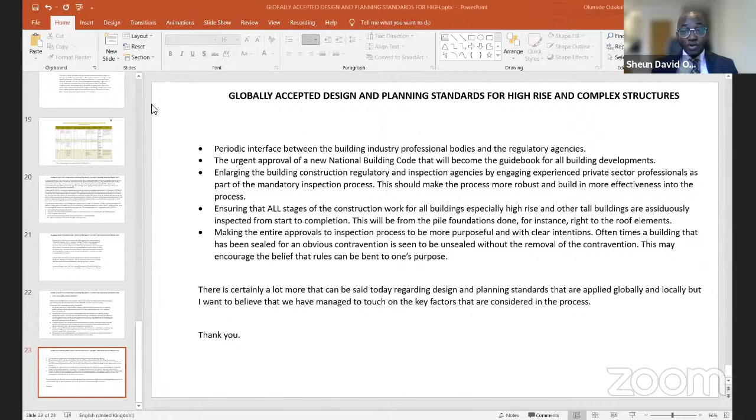Hello, good afternoon everyone. Greetings to all who have taken time out of their busy schedules to attend today's meeting. It's greatly appreciated. I'll just give a brief rundown of my topic, which is: what are the environmental factors that affect high-rise building projects?

Just to give you a background on me and my career so far, I am a civil engineer, chartered engineer, and I've worked in various phases of projects with various companies as a civil engineer. Currently I specialize in environmental management. I'll give you a brief rundown of some factors which should be considered when undertaking high-rise building projects.

Designing a sustainable tall building requires a total view of the entire building enterprise, considering the local and global environment, availability of renewable and non-renewable resources, decent community impact assessment, and the collaborative input of architects, engineers, planners, social scientists, and other community-based groups. The life cycle of a typical structure involves the following stages: planning, design, construction, operation, maintenance.

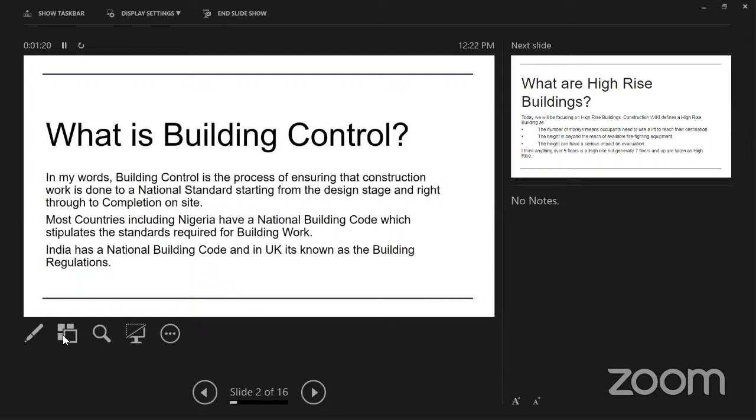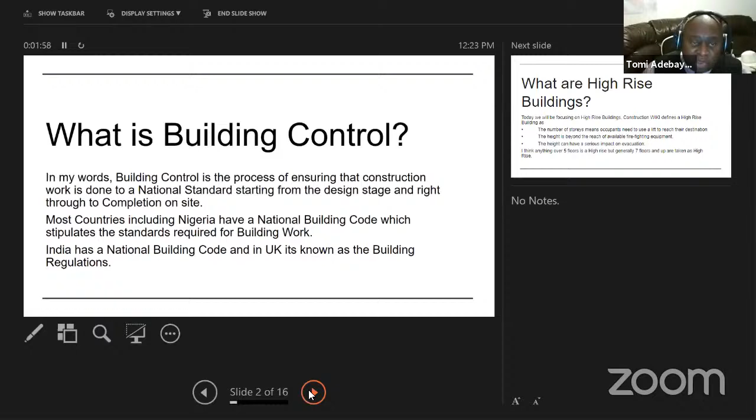Nigeria does have a national building code, but that building code probably needs to be worked on in terms of having supporting supplementary guides that can apply locally in different areas. Something that applies in Ikoyi will not apply in Abuja, will not apply in Ibadan, and will not apply in some other parts of Nigeria. So those documents need to be supplemented. I've gone through the National Building Code. I wouldn't say it is deficient, but I think it probably needs to be enacted because it's not enforceable by law.

Now, some of us have gone through various definitions of a high rise, and it does vary from country to country. But I think it should be related to the capacity of the fire authority in each country. In Nigeria, I don't want to say anything negative about the fire authority right now, but I can say it's not quite as advanced as you would expect, probably in North America. So if we are building 100-story buildings, 200-story buildings, we need to bear in mind that we are going to have challenges if there is a fire on the 45th floor, and how exactly are we going to deal with that?

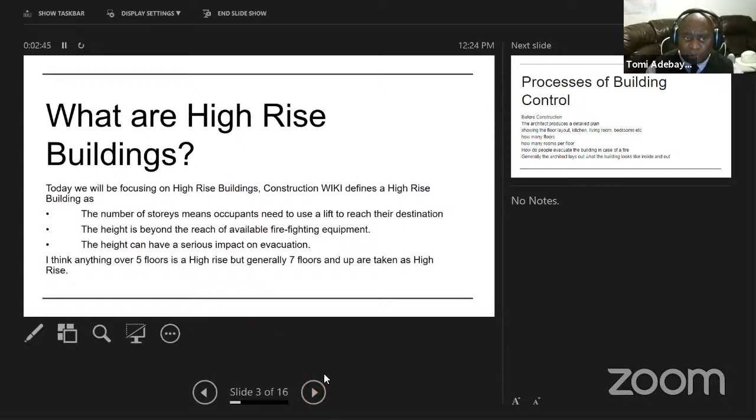So in my opinion, these are the processes of building control. There are processes that have to happen before construction. Before construction, Wale Ogundalu has mentioned some things, Engineer Igi has mentioned some things, regarding having the architect's drawing, having town planners, QSs, and all these people involved before this thing comes to building control. The architect produces a detailed plan.

The architect thinks of how people are going to get out of the building in the case of a fire.

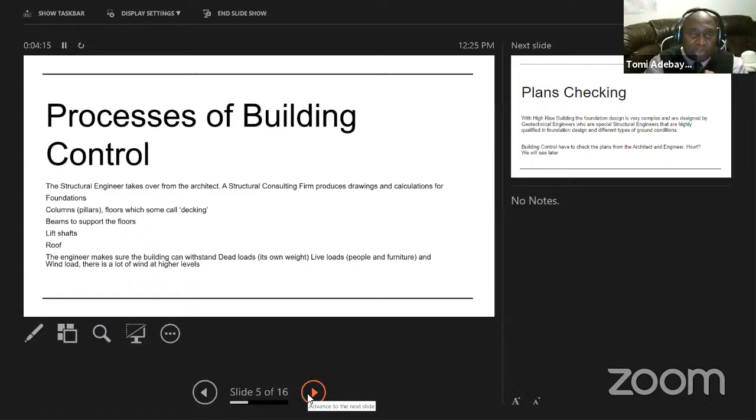When we talk about dead loads, we're talking about the actual load of the concrete, of the structure, the actual weight of the structure. And when we're talking about live loads, we're talking about things like people that are going to be in there in the final analysis.

Now, when you're talking about specialists, the problem with building control is that all these specialist drawings are sent to a building control section. Do they actually have the skills to check these plans? If I'm talking about finite elements method to a building control officer in Lagos State, does he really know what I'm talking about? If I'm talking about piling, secant piles, ground piles, all sorts of piles, does he really know?

I can see Architect Odukale said something about private sector involvement, because you do need these sort of people, because these things are beyond the skill of the day-to-day building control officer anywhere in the world. In the UK now, we have approved inspectors that are actually in the private sector and are regulated by a national body.

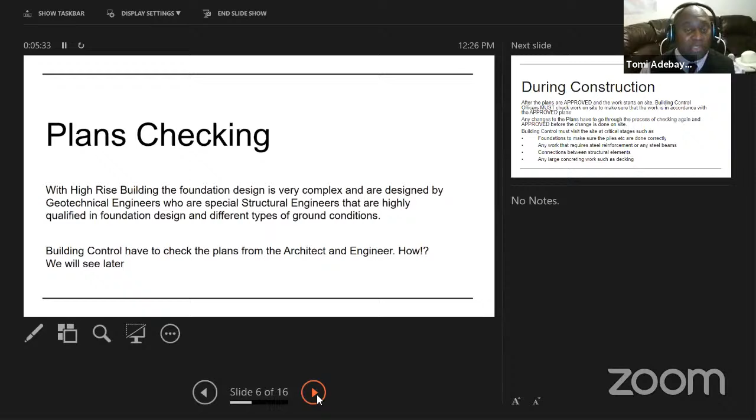During construction, you also have inspectors from building control who should have copies of the approved plans with them. Like, Engineer Ogundalu has said, this foundation is supposed to be this deep, this column is supposed to be 300 by 400, the reinforcement is supposed to be 20 millimeter at 200 centers. That is what he's got in front of him, and that is what he's supposed to be checking.

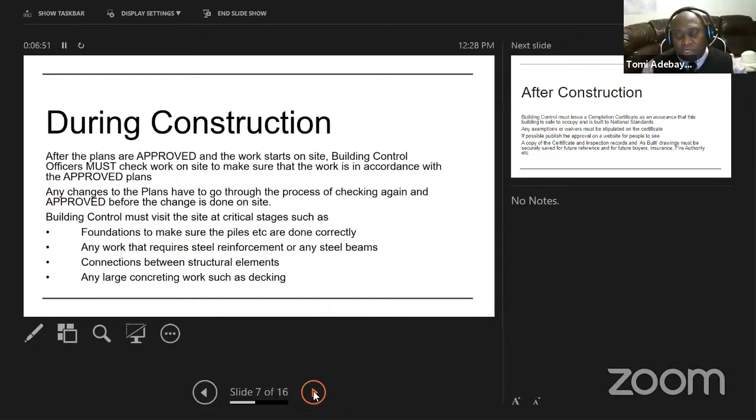When you're talking about specialist things, particularly high-rise, there are some things that could be beyond the skill of a standard building control officer. If you're looking at connections, steel reinforcements, some of it are very complicated. What steel needs to be at the top? What steel needs to be at the bottom? What are the shear links? In some countries, like probably in the UK, a structural engineer goes out to do the structural checks, and then you bring in all sorts of consultant building control officers to look at other things.

After construction, Lady Udo mentioned something about due diligence, and that is because sometimes a building or a flat needs to be sold. You want to buy a flat and you want to know that the flat you paid $1.2 million for has actually been checked, it has been audited by somebody, and there is a sort of certificate that you can use in future to say there is some assurance that this thing has been done properly.

You might have to take out an insurance to insure the property against fire, against different things. And those are where having a completion certificate shows that at least a level of assurance has been adopted in this property. You have to have a situation where you have as-built drawings, so you can refer back in future.

Now, I use the word effective building control because building control cannot be effective if the officers are not qualified and experienced in high-rise design and construction. Yet again, that can be helped with the private sector. You have to have building control officers that have legal powers. Like the architect mentioned, the National Building Code is not enacted. In the UK, the building regulation has an act, the town planning have an act, and they can lock you up, seize you, freeze your accounts, they can do anything when you don't follow the law.

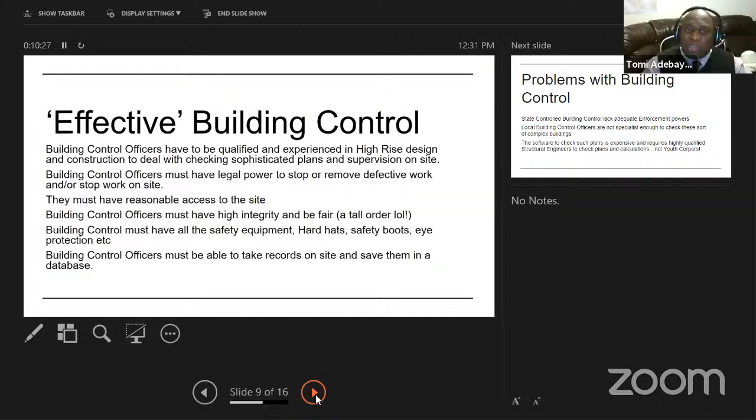Building control officers must be able to take records on site, and those records have to be saved safely. Not just paper records, those records have to be on a computer, because in future we might have to refer to those records.

Now, what are the problems that building control face? One of the problems they face is they lack adequate enforcement. In fact, they lack any enforcement powers in some cases. I think some states probably don't even have building control.

I think this unfortunate incident has focused our minds on building control in a way that we didn't before. Condolences that some people lost their lives, but in every cloud there is a silver lining, and this might be an opportunity for us to really look at some of these things and make sure this sort of situation, which is almost an embarrassment to the country, doesn't happen again.

Now, software - somebody has designed a very complicated multi-rise structure with thousands of pages and has just dumped it in front of a building control officer who doesn't have the software, doesn't have the skill to check them.

So it is important that we have equivalent people on the other side checking. In UK, just like Kayode has said, the developer himself has his own in-house checking. He's not relying on anyone's credentials. It doesn't matter that somebody has a PhD from Imperial College, it doesn't matter that he is a whiz kid. People make mistakes, omissions are made. Therefore, we should have an adequate and equivalent person checking sophisticated designs.

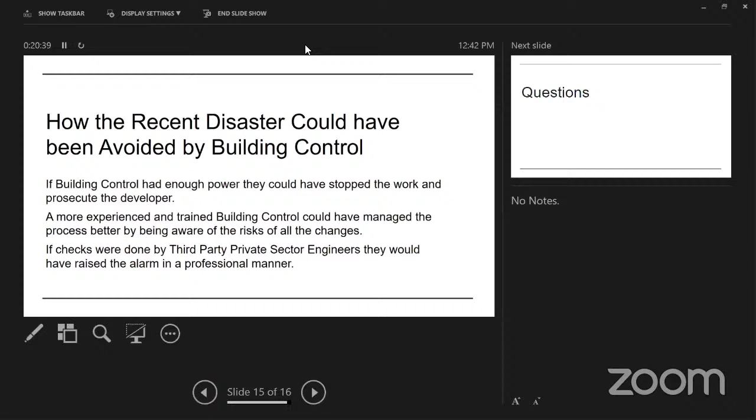Like I said, the Health and Safety Executive in the UK can freeze your account, they can suspend you as a company director, they can actually make you have a criminal record, which can ruin your career. So these people have very serious powers. We should also have a whistleblowing website where, as a member of the public, or as an engineer that's seeing something that is not right, you can just send an email to COREN to say something bad is happening there.

Now, if we look at the recent disaster, people have been blaming the structural engineers, but the structural engineers designed something for 6 floors, and that 6th floor went to 8, 10, and ended up as 21. No matter how much factor of safety the structural engineers could have put into that structure, it eventually had to obey the law of gravity and come down. Now, if building control had more powers, probably.

It's all about risk management, yeah? These things could have been, the risk could have been reduced. So everything that's happening within high-rise is layers of safety. In UK, you have CDM, like Kay mentioned. CDM will pick up who is the engineer, who is the architect, straight away: no, we can't have Mr. Blah, blah, blah as architect, he only left uni 2 years ago.

We have to have them have specific experience, train them. Even if we have to send them abroad to go and shadow, let's hope they come back if we do send them abroad. But if we do send them abroad, to Dubai, to India, to Chicago, just to see how things happen so that they can come back and pick up some international standards.